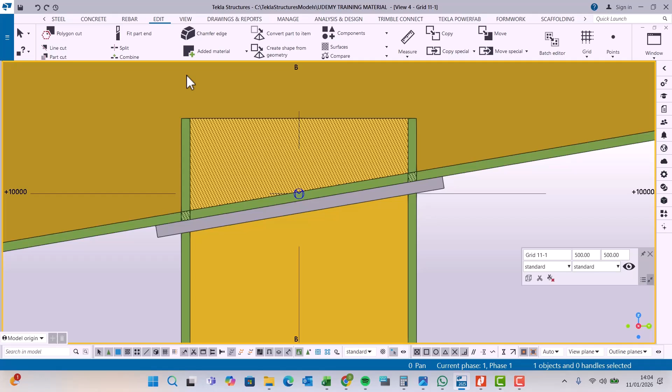Since you have this end plate already in place, the next thing I'm going to do is trim the unwanted parts. I'm going to come here and split this, select that, and split it from this far end here. Let me just close this one.

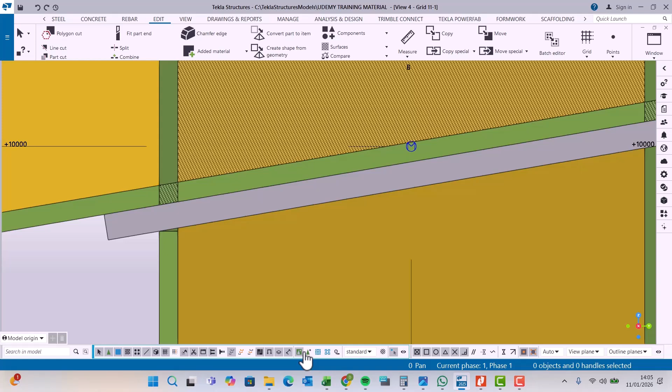Press undo. What did you notice? Because I trimmed off that part without deactivating this, let me make this active. This one gets deactivated. So if I delete that, I'll select on this and delete, and select on this and delete. Perfect, I'm going to remove this and that.

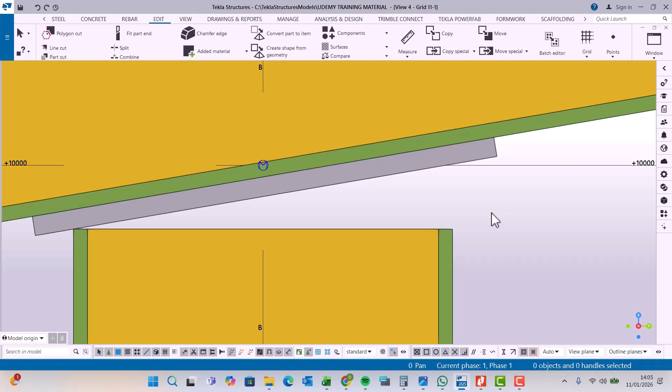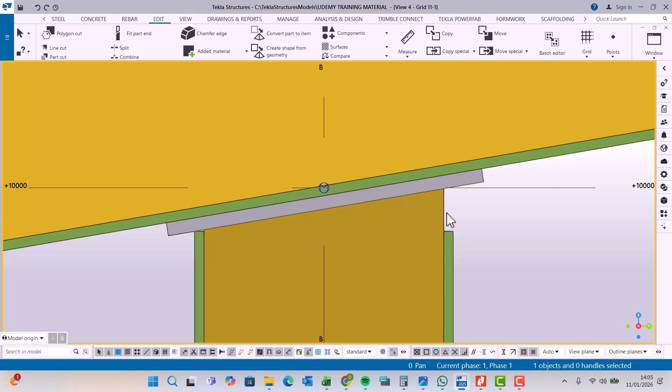Now I'm going to come to fit and pick the part that I want to fit. I want to fit this from here to here. I've fitted that and it's matching perfectly, and I can fit this from there to here, and that has been fixed properly. Now I want to fit this up to that spot, and I've done that perfectly well.

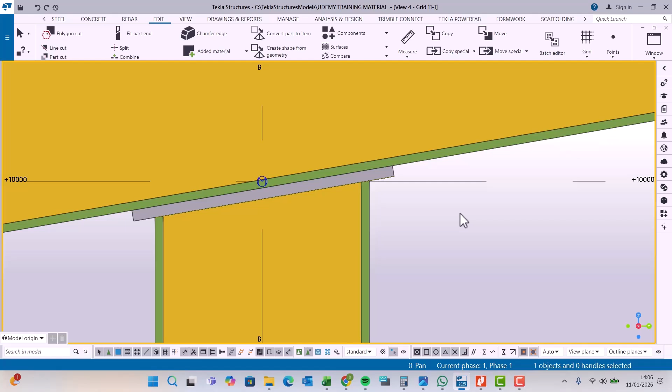Now the next thing I'm going to do is place my bolts. But if you check close here, I need some stiffener. How do you place the stiffener? To place the stiffener, I need some guiding points.

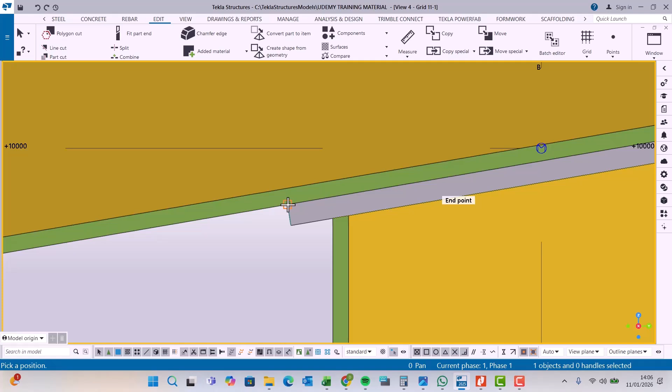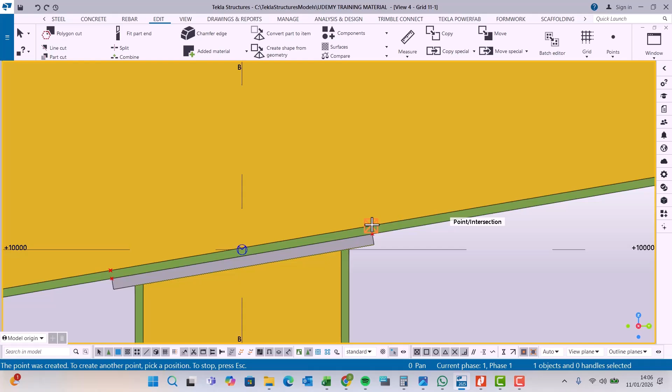So the guiding points, I'll use this edge and terminate it right there, and come to the side. I'll use this edge there and transfer that point to that side. Now I want to transfer the same point upward by coming to points once again, pick on that and this point, right click and come to perpendicular, and snap right on the top here, then transfer this point at the top here.

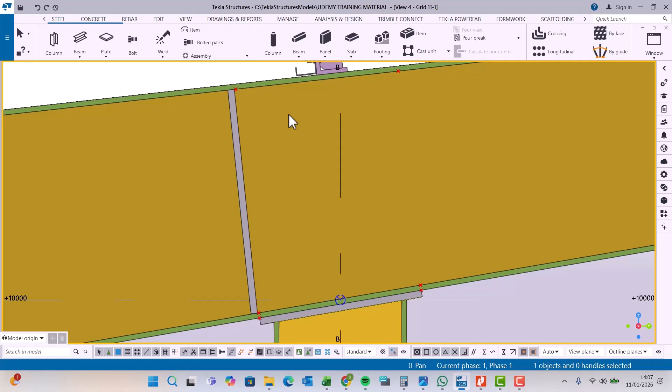Remember, this plate and this plate will not be the same again. Now I'm going to pick on that and pick on this and terminate it right there. Remember, the width is what? It's 121, I hope you haven't forgotten that.

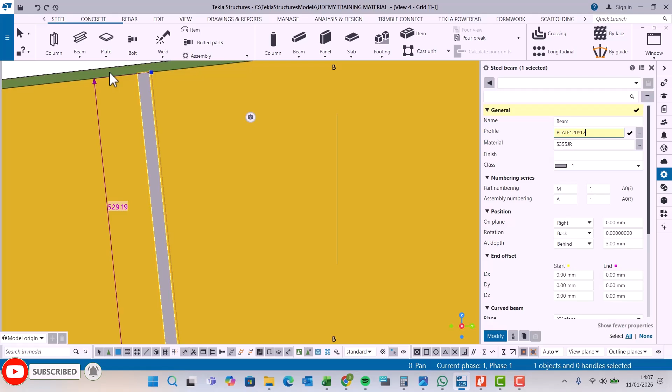I'm going to double click on this and scroll up, and we want to change this to 121 or 120. That's okay. But we can change this to 12 because our flange is 12. So for any stiffener or any connection, we use the utmost biggest thickness we have in that connection. So in this we have 8 millimeter and 12 millimeter, so we'll use 12 as the minimum.

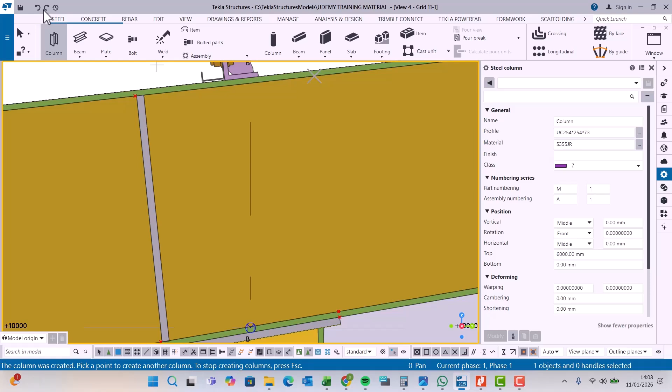Now I'll switch back to left. Not that, I'll switch back to maybe front. Let me see where it's taking us. Perfect, and take this one also and take it here, and I'll terminate it right there. Not the best placement, let me try that. Try this.

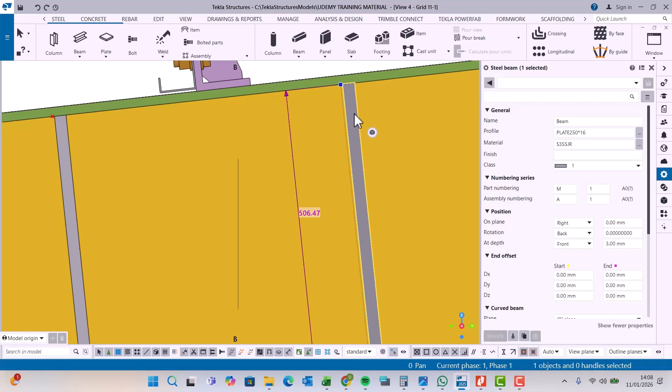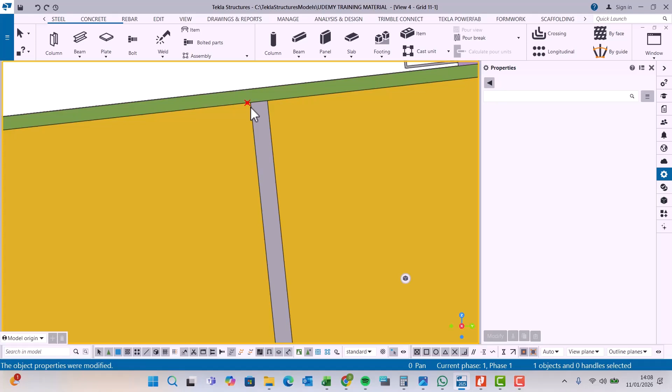We have that in place. If I double click on it and come to, I'll come to maybe behind, and there we are. So we need some trimming now. Double click on it, this is 250. We need to make it 120. That is 120, so that's cool.

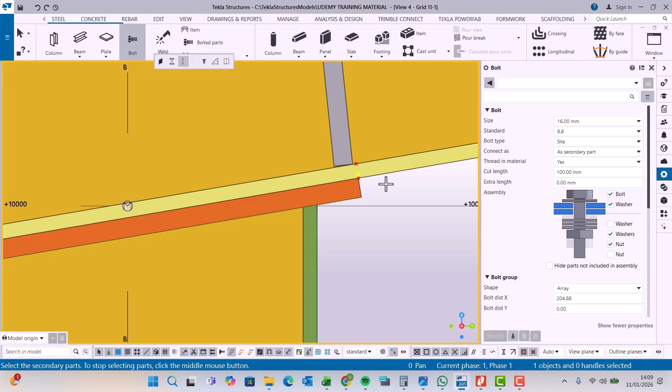So another thing is the bolt placement, which part do we need to bolt this to this. Press my middle button on the mouse and I'll stretch all the way and end it right there. So I have bolts in place.

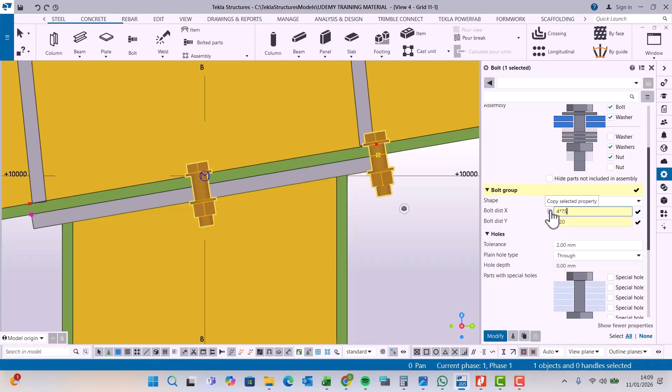If I double click here, I'll scroll down and I'll need 120 right there, and center to center probably 4 bolts at a distance of 75 right there. 75 is too many, let me scroll down and I can key in maybe 50. Not making sense to us. 50, so that's okay, that's cool.

That is cool, that is cool. Let me scroll up and change this to 3. Change that to 3, and change this to maybe 100 and see where it ends.

Probably 80. 75. 90 will do good for us. So there we are, and I've placed that in place.

But it seems to be too much bolts. We can change this to make it 2, and make this to be 100. Let's see the wonders. Or we just key in 100 and boom, or 200 and boom. So we have to readjust this to 100 and move it right at the center there.

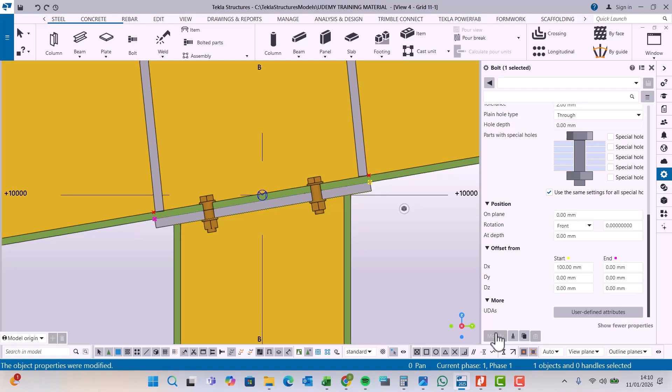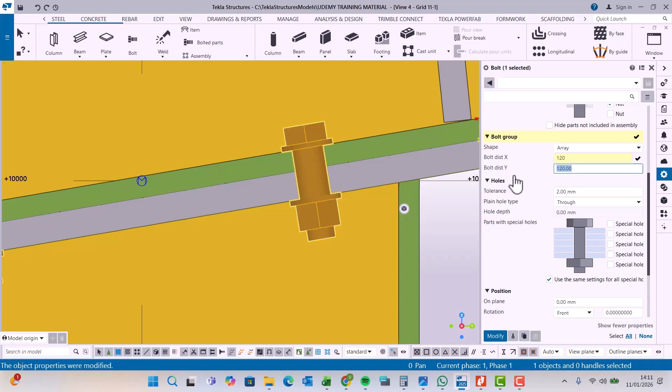So we have the bolts in place. But if you take a look here, there's something wrong that we need to work on, because I can see clearly the bolts are not in place, are not well done. So what I'm going to do is simple: let me turn this to 120 and change this to 200. Let's see. Not the best option, 200 and 120.

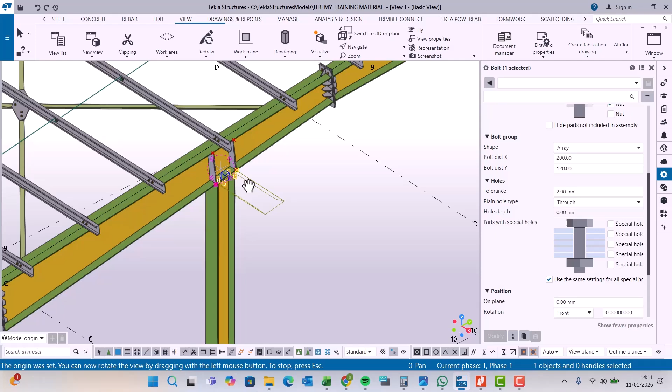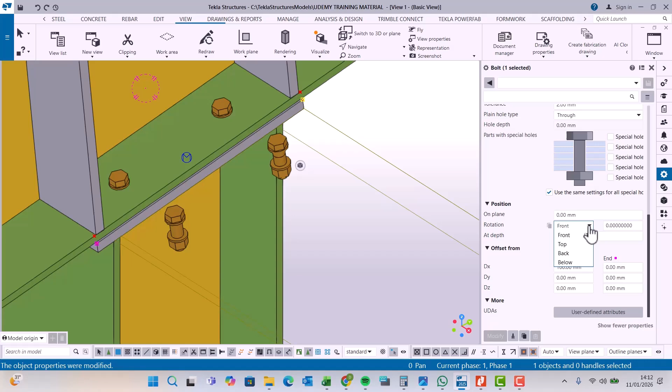Now let's switch back to isometric and see what we can do, because now our class is almost winding, and you can see where we are struggling, why we are struggling. Let me change this to that and click modify. That's 100. If I come there, click over that, and that will be a wonderful position.

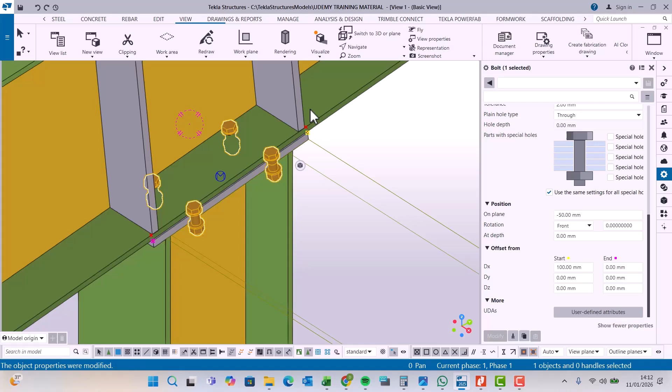So let me come here and key in 50, half of this, and prefix that with the negative sign. So that takes it in. Remember, the width is 250, that is 250, that's 125. So we'll have this 125 in place.

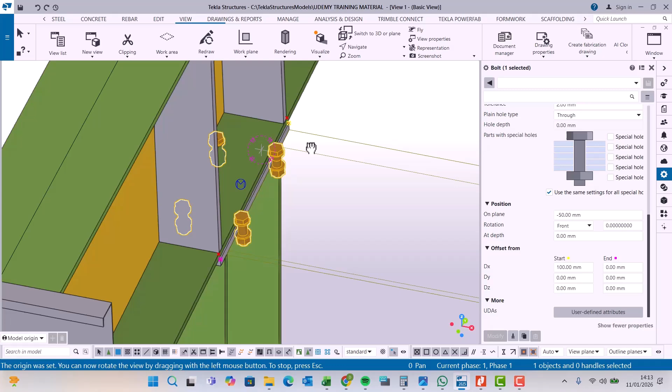Not really the best way, but not really the best way. Let me make this 0. 100. Perfect. But it's not right in the middle, it's not right in the middle. Let me double click

and zoom out. Let me rotate this, rotate this, just to check what we are missing. I'm trying to check what we are missing. And do that, and do that, put it like that.

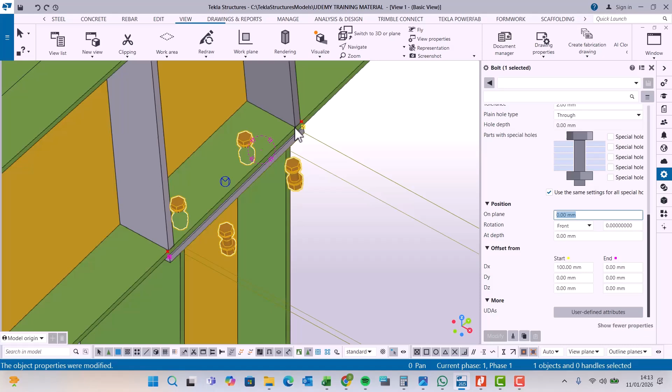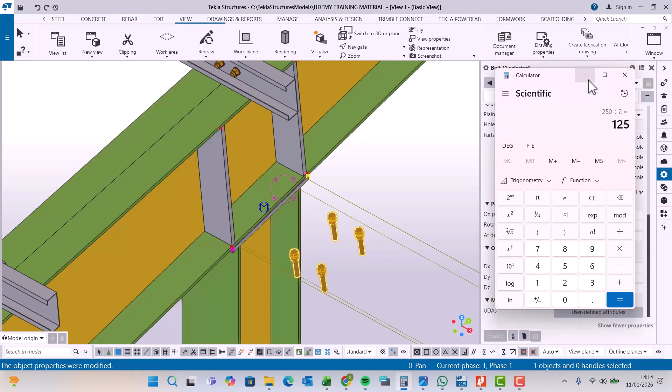So this, from this center to the other center, that is 250. Fix that by 250. And we are off the target. Now what I'm going to do is just take this 250 divided by 2, and we have 125. If you prefix that 125 and click on it, we are on top of things here. And there we are, navigate that, and if we turn that around, we have our connection in place.

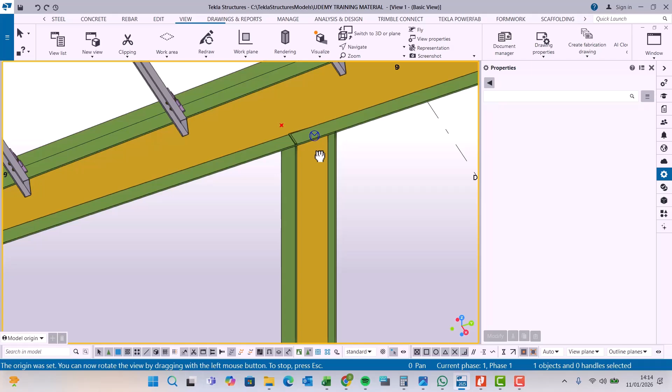So that part is done. So we just apply the same thing here, and boom, we're done. So let me do this behind the curtains, because you understand what needs to be done. But I will not do that, I'll still do it in front of your eyes so that we learn something. But for now, let me terminate this at this point. And then